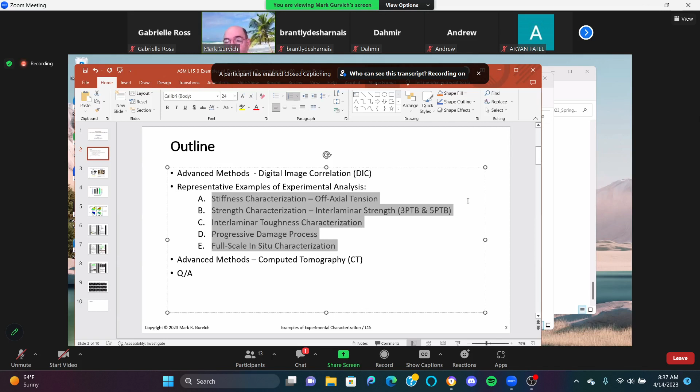One additional comment: I'm showing examples from papers we already published, so they're publicly available, and there are no restrictions to share. If some of you have specific interest, just drop me an email and I will send you the actual details. Of course, you can imagine there is much more that we are doing internally, but it's usually confidential and proprietary. Those results cannot be captured for public distribution.

So let's start with digital image correlation. Let me show you a high-level picture of how it works. It's an extremely promising experimental method, and it could not have been done like 50 years ago, because it's based on advancements of computational progress.

So you see my cursor. Imagine you have a surface of a structure, a surface of a coupon you want to analyze. On the surface of this structure, you could put a couple of points—in reality it will be thousands and thousands, but for simplicity I'm describing it as several points—for example with a pen or pencil; we're not talking about the methods to apply them. Actually, there is even a sub-industry on how to make those points efficiently, usually called speckles.

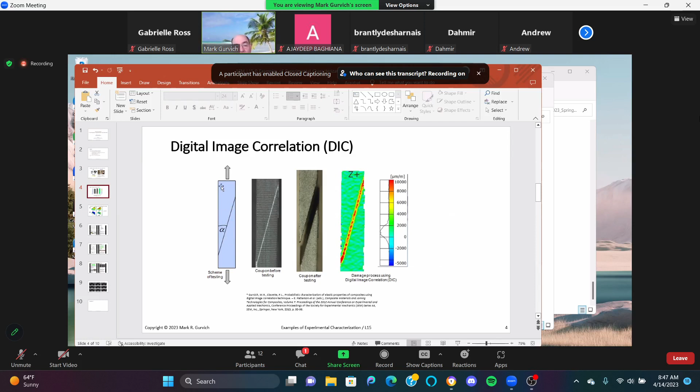This was definitely maybe the easiest scenario, not easy, but from a geometrical perspective, because we have a flat coupon, nothing is complex. But now these are a couple of examples from more complex real structures, when we have non-flat geometry, you see curvature here, here it's a connection between one shell and another shell, and this is one example. On the top, we see the measured displacement field.

Because we have so many points, tens of thousands, maybe hundreds of thousands, the field became extremely smooth, a nice non-uniform distribution of measured displacement. On the right side is the analytical calculation of strain, computed as the analytical derivative of the displacement measurement.

You see strain concentration will be somewhere here. If you're a designer, you'd say, this is what I need to worry about, check if it's strong enough. If yes, keep it or reduce thickness and size; if not strong enough, you need to change size or geometry. This is another example from a similar structure but different position.

Again, you see curvature in one orientation and curvature in another orientation. Two surfaces contact each other under a certain angle, and those are measured displacements in orientation X, global orientation X. Here it's already the calculated distribution of strains based on measurement of displacement and follow-up derivation.

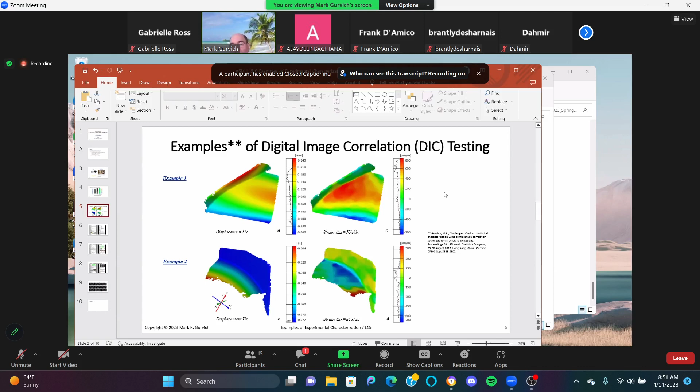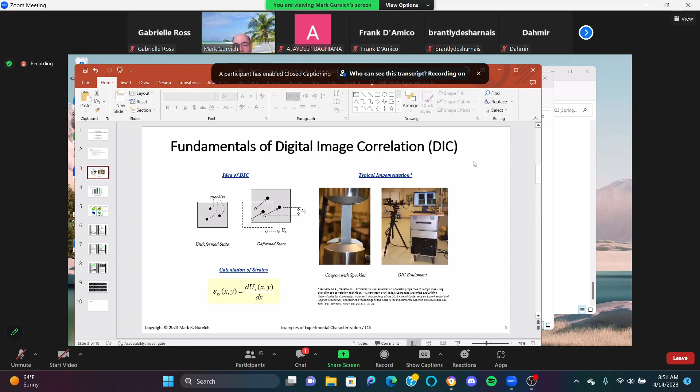It's very good for fatigue analysis when you have cyclic load. It's very good for high-speed load when you have impact, ballistic, or crash type of analysis - in this situation you just need to use high-speed cameras. We also applied it for many dynamic problems, including crash and vibration. So there is no limit. Again, I strongly encourage those of you who will move into the experimental world to pay attention and get involved with this technique. Any questions or comments so far?

No? So let's go to another example, and now let's move to stiffness characterization. Again, I will use the example of off-axial tension, and you will see even this relatively simple test can be extremely powerful from the viewpoint of generating new results. Let's go.

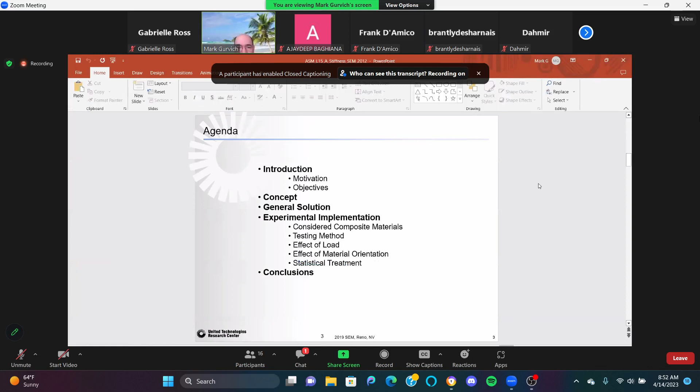This paper was published some time ago with my co-author Pat Clavette, and this is the statement of the problem. As I mentioned in the last lecture, it's an extremely powerful test when we have a coupon of composite material, cut under different angles.

So this is the scenario: we have a rectangular coupon of composite material. Material orientation 1 is under angle alpha with the applied load - let's code it 1 prime. In your lectures we usually code it X, but it's practically the same. So material orientation does not correlate, it's not the same as the orientation of applied load.

When we apply tension, as we know, because it's under angle, there will be non-zero shear - so it elongates, but there will also be non-zero shear, as we discussed in homework 1, for example. But let's prove it - let's prove it experimentally.

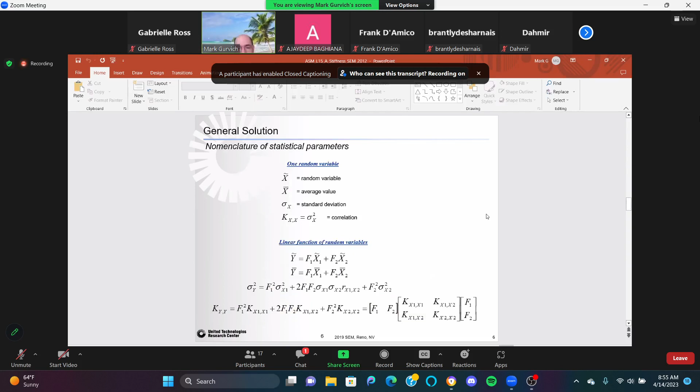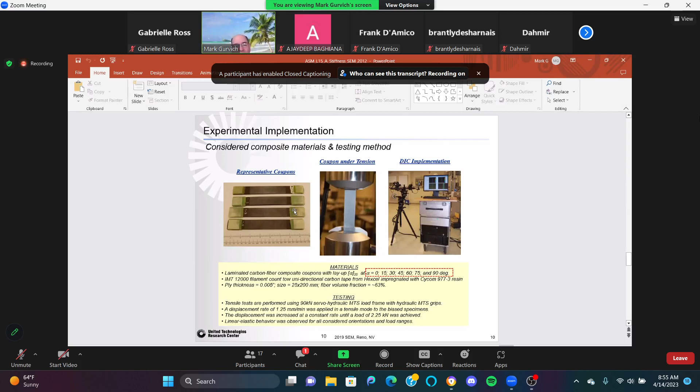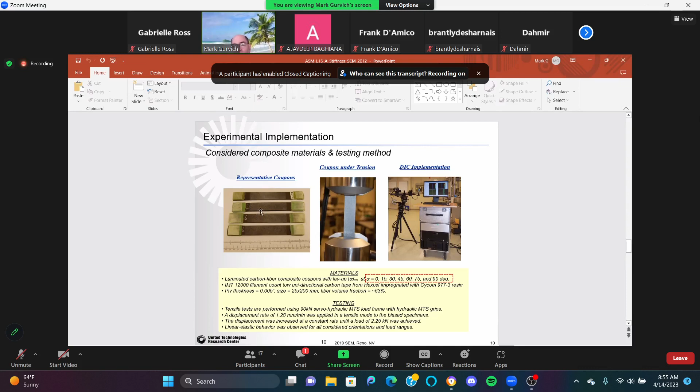So I'll skip all the math that we presented here, and here we'll show you what was done. Those images are already shared with you as examples of DIC, but we created different coupons, representative coupons under different angles of fibers. Please pay attention, at the ends we have those kind of clamping devices. You need to glue them to be sure that when you clamp them and apply a load, the composite part will not slip. Again, we discussed it at our last lecture, but this is just a good example of how those actual coupons are done. And now a couple of examples.

For example, I'll select a coupon under angle 45 degrees, in this orientation. And now I'm playing with different levels of load. At the very beginning, there is no load, so displacements are uniform. Red is 0, no displacement.

I increase the level of load, so it became slightly non-uniform. At one side, there is no displacement, and it started to move on the opposite side. So we fixed here and applied load here - you see my hand, from the bottom.

Now I increase level of load 450, 900, 1350, 1800, 2250, and you see non-uniformity increase, and the higher level of displacement we have, the more obvious we see this kind of shear, because of this 45 degree angle, and all of them have some level of non-uniformity, but with higher load it's much easier to see - this angle represents the shear we would expect for this type of position.

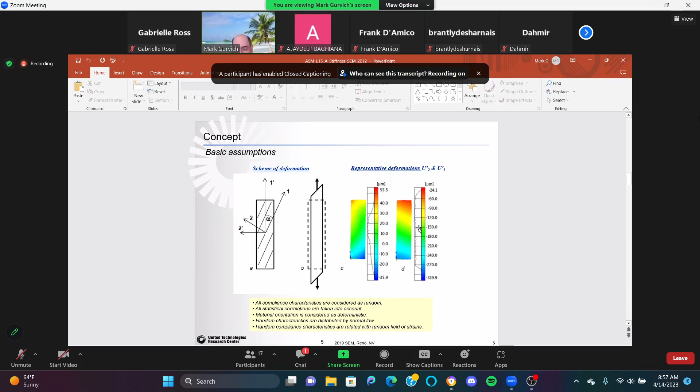And it's very important to emphasize, for this type of problem, if material properties were the same in orientation 1 and 2, we would not see this shear, because it would deform uniformly, as we discussed in modeling of deformation of anisotropic bodies.

And this is another interesting example. Now if we play with different angles - coupons under 0, 15 degrees, 30, 45, 60, 75, 90. This is 90, what I discussed just now, material orientation perpendicular to load orientation. So when you apply load, all of them move parallel, so there is no shear. Similar scenario with 0, it's practically parallel.

But now if we consider different angles, this kind of shear becomes more and more pronounced with higher angle. So you see at 15 degrees we have some angle, with 30 degrees we have this angle, 45, 60, and 75 it's close to 90. It's not 100% uniform, but this angle here is relatively small.

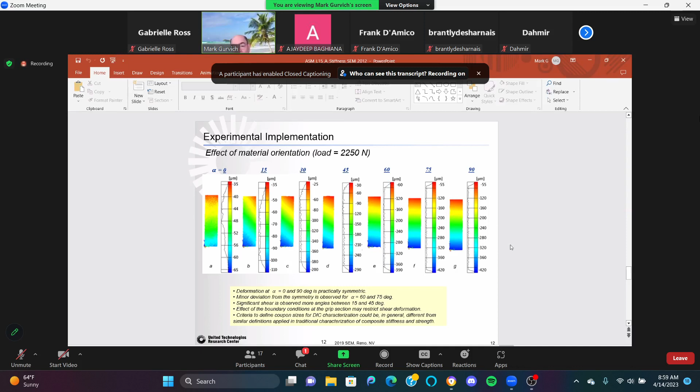So again, it's a perfect example of experimental validation of the expected analytical trend with respect to shear, but we had tons of additional data to analyze. And actually what we did here, we used these results to understand what is the variability of stiffness properties, how much we can trust them, how much plus-minus we have.

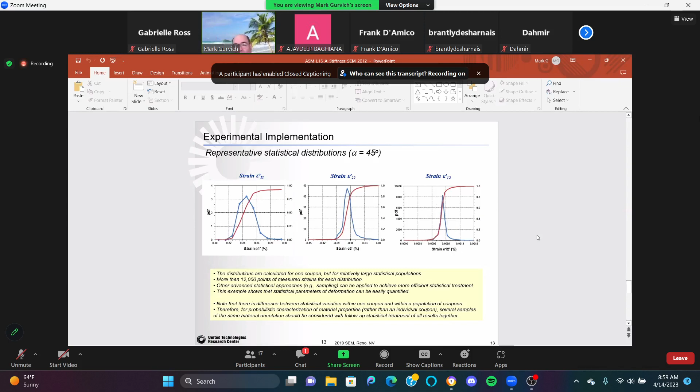Ladies and gentlemen, any comments, questions regarding this example? Yes. So let me go to the next example.

It's strength characterization. And again, it was published with my co-authors, Mark and Patrick, in 2016, so I can share with you.

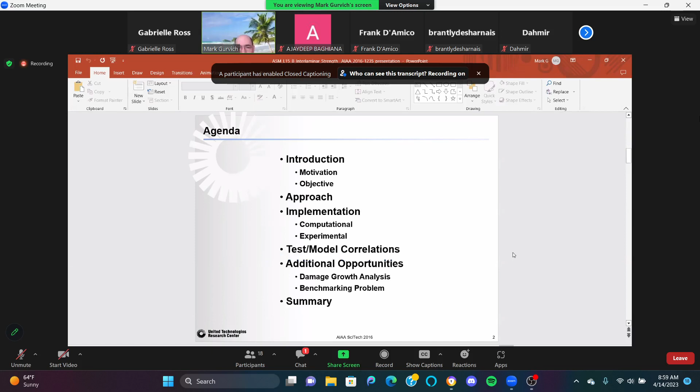And here the interest was to characterize interlaminar strength. You may remember from our lectures that for composite material, interlaminar strength is actually one of the most important allowables, because interlaminar behavior is usually the weakest. In plane, we have strong fibers, but between layers, only polymer.

So usually it's a big problem to be captured. And for example, here at the left, I showed a couple of photos when we have ply ends, and here you see boundaries, interfaces between different layers. So when we apply load, for example bending or twisting, usually the fracture pattern is something like that - a crack initiates at the interface and quickly propagates.

So to capture that and to analyze, we need to know allowables. This scenario is very typical. I'm showing here one representative example, an actual rotorcraft component.

So those interlaminar type of damages could be in one orientation, XZ, or another orientation, YX, here at the very end, inside, but this is quite typical type of scenario.

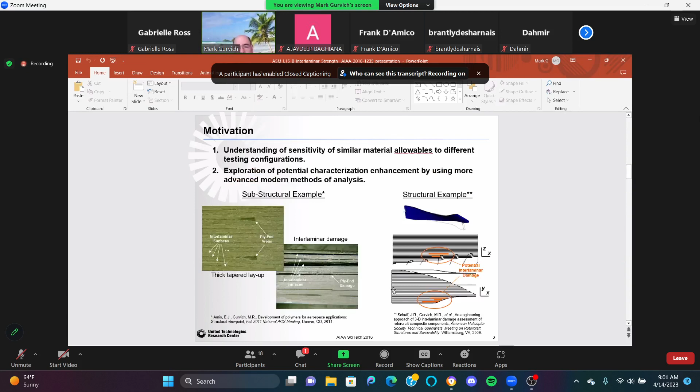So to characterize it, we need to have this interlaminar shear strength. So what to do - actually the traditional test is something like that: 3-point bending. You have two supports, an impactor where you apply load, and because of this bending you would expect shear, shear component through thickness, but eventually it will break if it's relatively short.

But we moved beyond that. We could say, okay, let's check if the same properties will be under different load conditions. So this is a scenario when you can kind of squeeze both sides to have built-in supports, but still use the same 3-point bending, but under different load conditions. Here we propose 5-point bending, a 5-point test.

And here, similar scenario, but with different aspect ratio. Reason why? Because 3-point bending is statically determined. When damage happens, the structure is practically gone. But with a statically indeterminate system, like here, you have first damage, the structure still can handle load. You increase the load, it will be next damage.

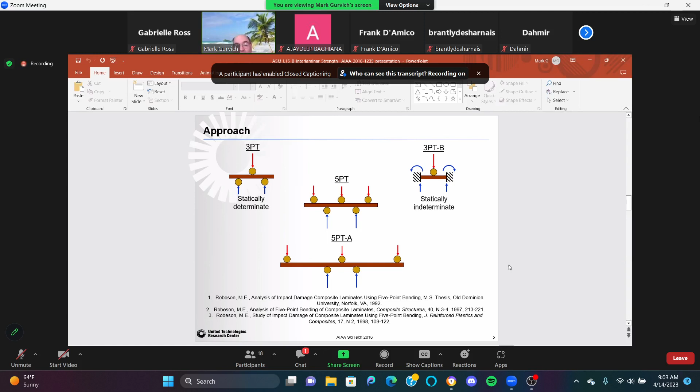So it was extremely powerful test what we proposed, to analyze progressive damage. But here, let's speak about interlaminar shear.

Those are finite element predictions for half of them. So for example, if I have this half, this will be one support, another support, the impactor. So maximum shear stresses are expected here and here. If I have similar 5-point bending, maximum will be somewhere here. And if I have 3-point bending, for a half, maximum shear component will be somewhere here. So those are predictions, 100% computational, no experimental.

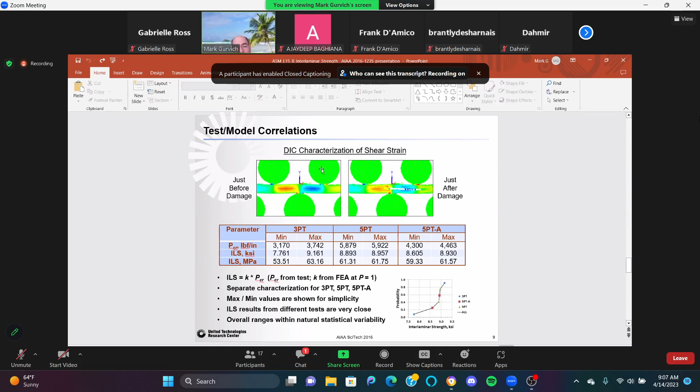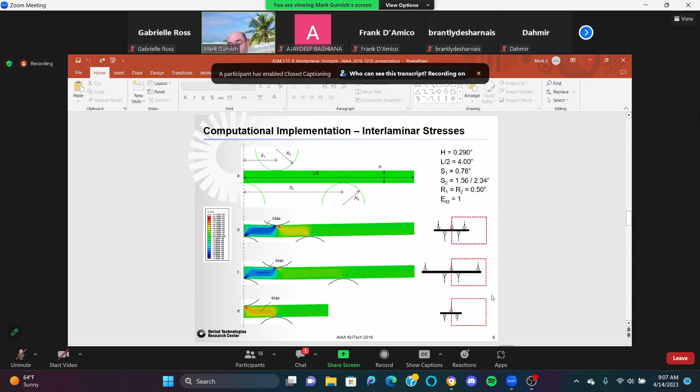And again, this is 100% experimental strain distribution. And this was - if you remember what I showed - this was what I expected analytically. So almost like twins. So it shows us that we can really trust the generated results. Actually, it was for this one. So we can trust the generated results, not only at absolute level, at this point, but also as a distribution of one field versus another.

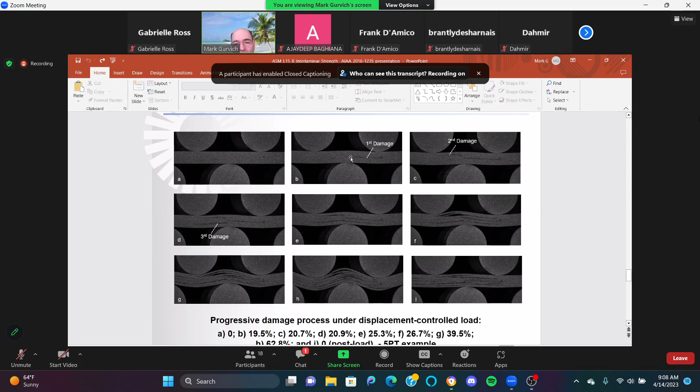At load 0, there are no damages. So increase the level of load, for example 19%, 19.5%, boom, I will see the first crack here, first interlaminar crack. Let me make it a little bit bigger so you can see it, probably you can see this crack, yes, here.

Continue increasing load, here will be the second crack. Continue increasing load, it will be the third crack. So continue with the load increase, it will be more damage, and eventually it looks like that. In this scenario, it's still capable to handle load, but now we see a lot of interlaminar damages, yes?

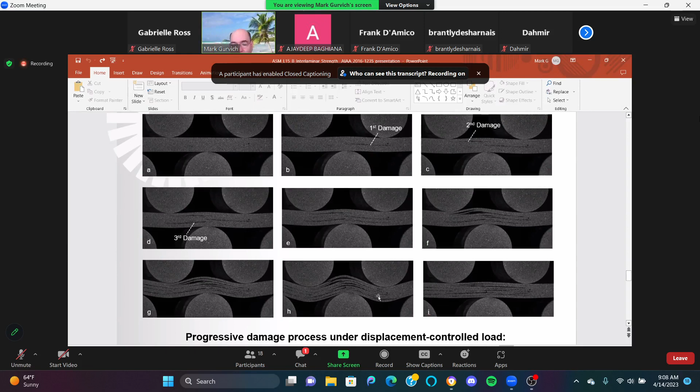And actually they can be predicted by damage tolerance criteria. It's another kind of set of papers we published to correlate this experimental process of damage versus analytically predicted. Yes, and eventually, let me go back.

Eventually, it will look like this. Yes, it's a photo when we have all those interlaminar damage at extreme level.

And those photos, now you see photos of tested coupons. After that, you still see after the test those interlaminar damage. And this is exactly what we wanted, to create like a standard test to capture interlaminar damage progress, because it's one of the critical weaknesses of laminated structures made of laminated composites.

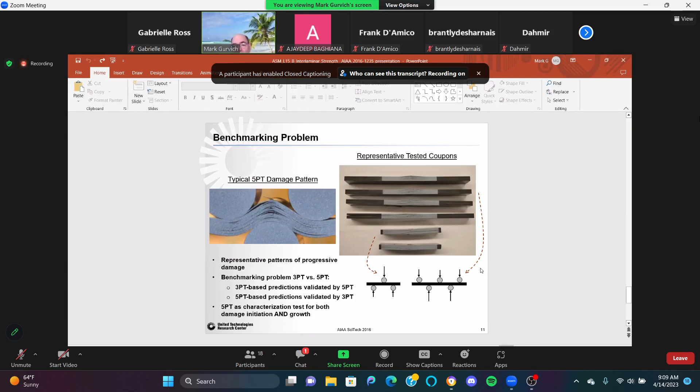Yes, any questions, comments so far? Again, just for illustration, but wanted to be sure you see it has real practical importance.

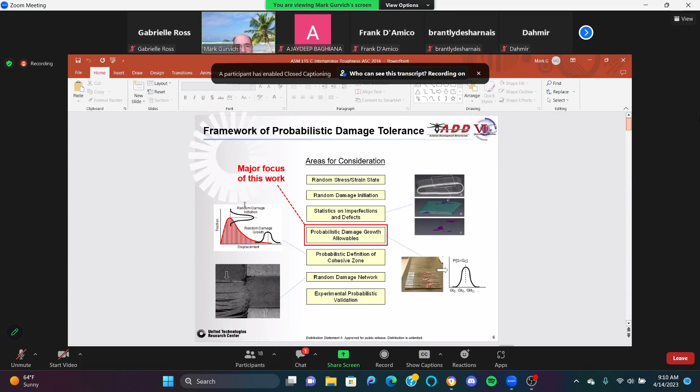So next example, interlaminar toughness. Yes, interlaminar toughness, have to characterize it. And again, we published a paper here in this area. It's focused on probabilistic characterization of interlaminar toughness.

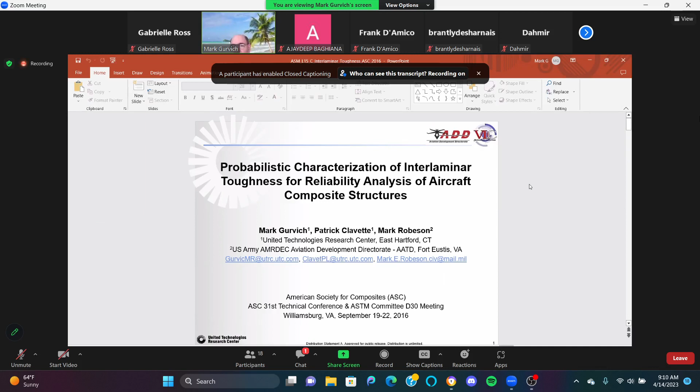Yes, I'll skip the probabilistic portion. I just will show you the interlaminar portion, but it will be easy for you to see how the actual test is performed, done. Yes, skip it here.

So we started with this example from the previous paper, and to predict this process, we need to know damage tolerance properties, primarily toughness. Yes, not only strength we discussed in the previous paper, but toughness. In other words, if you already have a crack, what is the risk this crack starts to propagate?

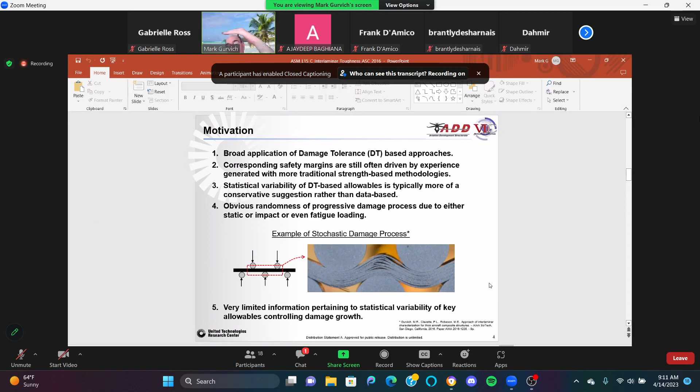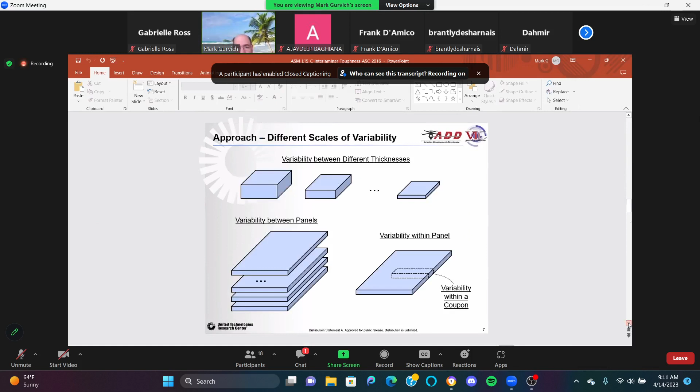So what we used, let me skip it quickly, we used this test as we discussed. This is a standard test recommended by the community. You remember I mentioned in the previous lecture the ASTM standard. So this is one of the standards.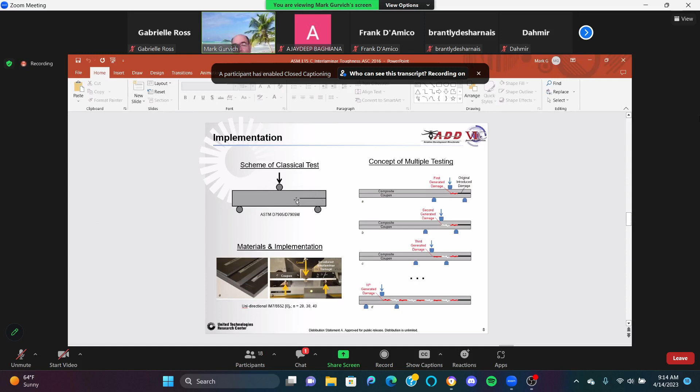So now crack starts to propagate from here, then from here, and so on. If you have a relatively long coupon, from one coupon you can actually capture a toughness measurement several times. In our examples, we capture up to maybe 15 to 20 times. Each data point will be slightly different through statistical variation, but altogether it gives us a very good statistical pool, providing a high level of confidence. This was the approach we did here, but to emphasize, this is a very practical test that people are using.

So for example, this is crack number 1, 2, 3 with each implementation - you see almost up to 16 or 17. So from one coupon, many data points can be generated. But what we saw was a big difference between initial crack - defined by Teflon insert and relatively smooth end - versus a natural crack, what we call them. The difference was almost twice. So that was one big observation, and another was that there's a relatively significant statistical variation defined by this cloud. And we played with different coupons of different thickness, and we saw if it's thicker or thinner, the generated data could be slightly different, which was important for our application.

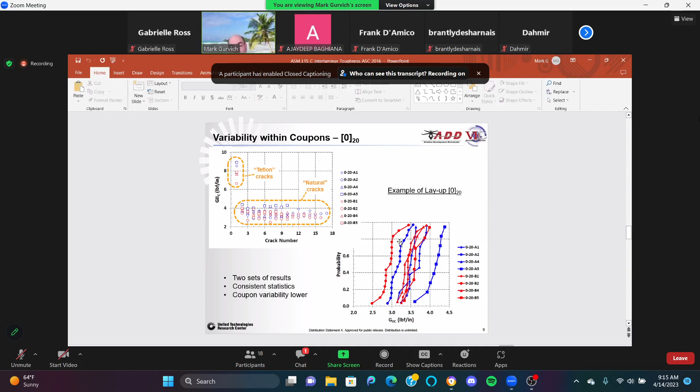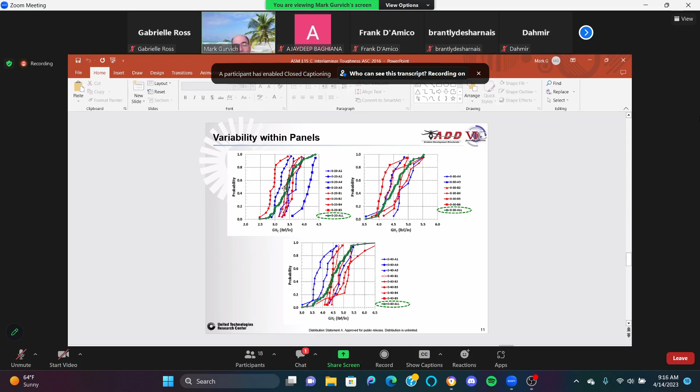I don't know how much you are involved in theory of probability and statistical analysis - you mentioned some of you had measurement classes.

So eventually data can be summarized in form of a histogram - this is what we did. And based on those histograms, we could say we're able to select not only the average value, but also the tails, like the worst case scenario with given probability. So what we did here is calculate statistical parameters of this interlaminar toughness, but also selected boundaries that we can use as allowables for a given probability of non-failure - 90%, 95, 99, 99.9, etc.

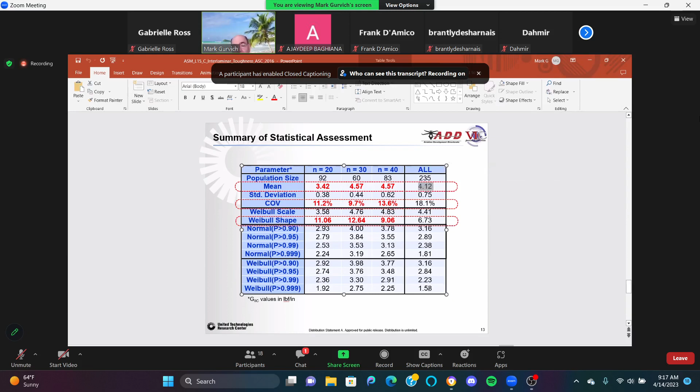And if we had one scenario, normal distribution versus Weibull distribution, we got different values of course. But from an engineering perspective, what you will do is select the worst case scenario. So from here you could say, I would need to use 1.58 - it would correlate with 99.9% probability of non-failure. And it summarizes all our statistics here, but the average here could be about 4.12. So it's a huge difference versus average and the lowest boundary for engineering allowable. So instead of using average, we need to use this tail value here.

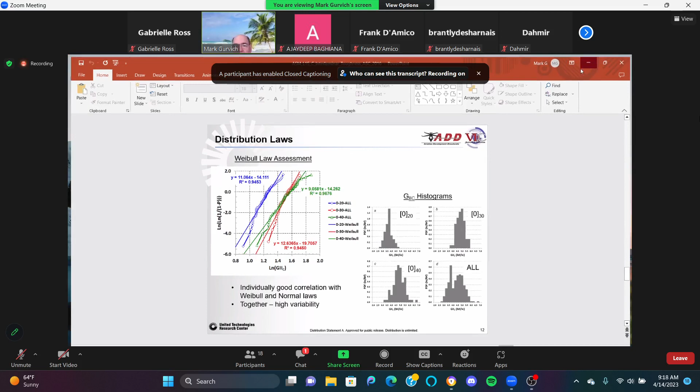Any questions, comments? Okay, let's go to the next example - progressive damage process.

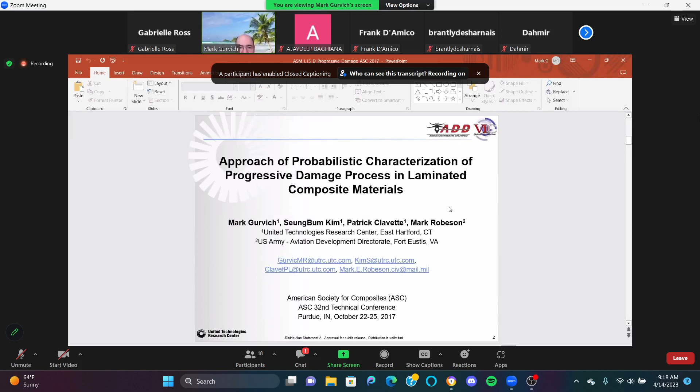We published this a couple of years ago with my co-authors, Dr. Kim, Dr. Clavette, Dr. Robeson. So I can show it to you.

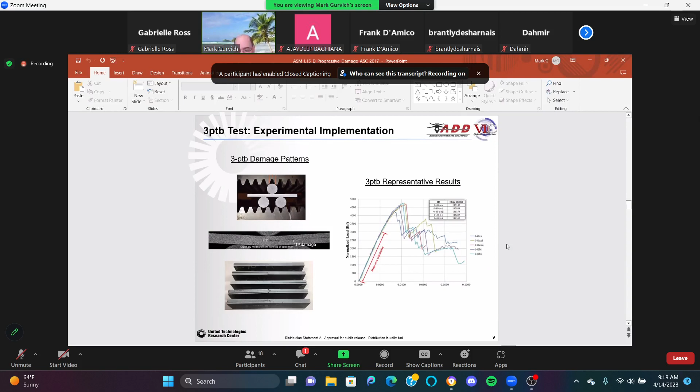So when we use it for a bigger population, each individual coupon will have a different pattern. Here's coupon 1, coupon 2, different coupons, but qualitatively they're quite similar. So if they're qualitatively similar, we can combine them for quantitative assessment of statistics and make predictions not only for average but for tails, for extreme scenarios. So usually what people do - it's a very time consuming, expensive test, but it's extremely valuable.

So we had about 20 different coupons. Our technician tested each of them. So each line here is an individual coupon. You see the cloud is relatively narrow - it's kind of showing qualitatively that it's the same.

But this also provides us with a very good opportunity to quantify variability here at the very beginning, or during the process. So, for example, if you want to design something, you will not select the best case - of course you will select the very worst case. One of the major takeaways from this class would be: as engineers in structural analysis, always focus on the very worst case scenario.

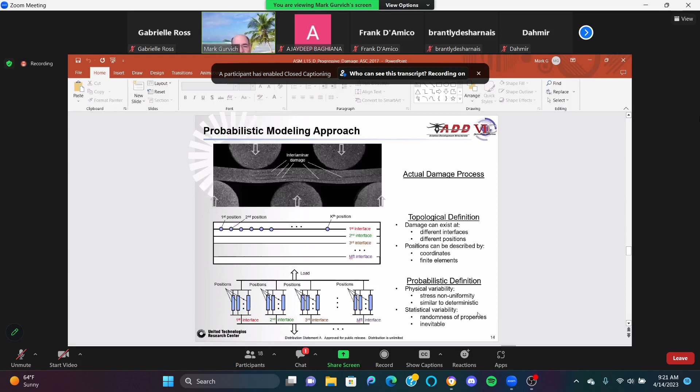Don't care if there are other locations that exceed the strength or toughness you need - you always need to worry about scenarios where you have problems, and your design will be focused on those locations. So again, about 19 different coupons, all of them are qualitatively the same, so we can quantify them, and analytical methods have to do it.

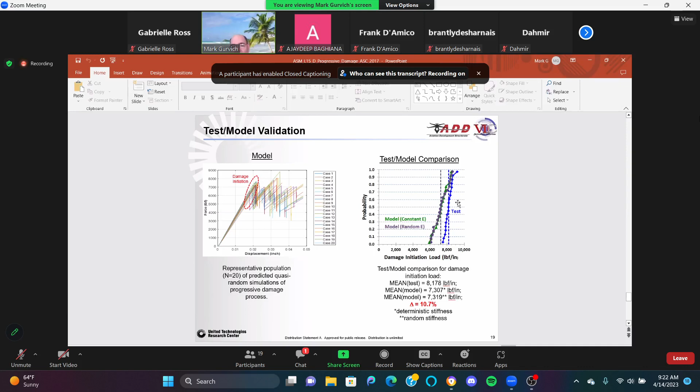But bottom line, test validation. So this is a similar diagram to what we predicted, because we were interested at the beginning. This distribution, the blue line, is test. The black and green lines are two different variants of analytical predictions, and the gap between them is about 10%. For absolutely blind, completely independent predictions, this is considered to be very, very good, because usually we have a much bigger gap, like at least 20%. So we're extremely pleased.

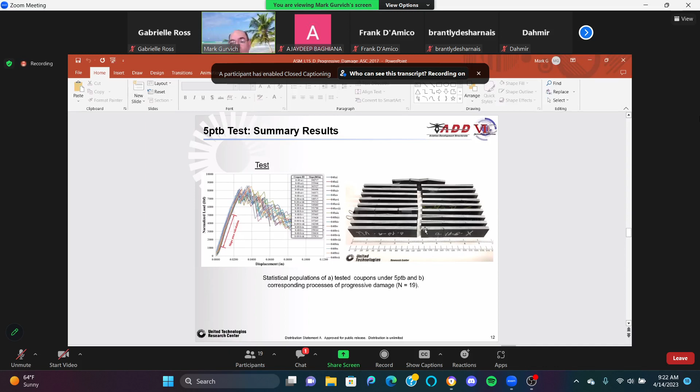But coming back to this example, toughness is characterized at the coupon level, especially if we need to know what is the level of their statistical variability. Any questions, comments so far?

It was this example of progressive damage. Let's go to this full-scale in situ characterization. Let me get - in situ, it's from Latin, should be like in this form. So what does in situ mean? You have a structure, an actual structure, not a coupon structure. You test it for some load conditions, see when the structure breaks, and from here recalculate material properties.

Usually people go in the opposite direction - the direct approach - to have material properties from coupons and predict how the structure behaves. But for some cases it's very convenient to do exactly the opposite: specifically generate some structures, break them, and from here recalculate material properties. I will show you one example in this direction.

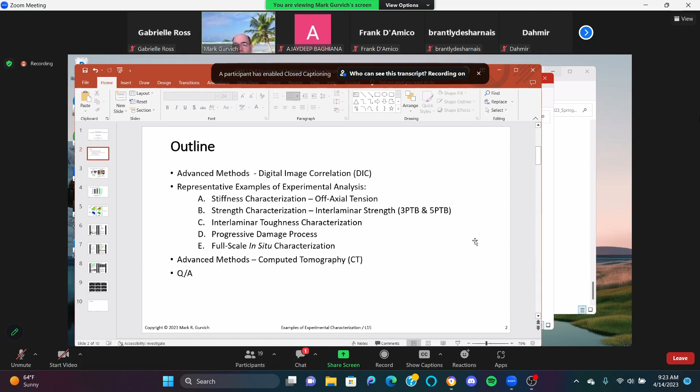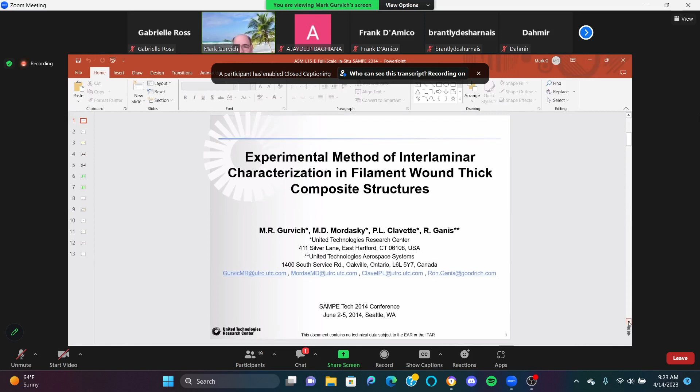So again, this was work we published a couple of years ago with my co-authors. The statement of the problem was the following: we had very thick composite tubes - you see those orientational fibers - but we needed properties of those materials, primarily interlaminar.

And for interlaminar, as I showed you before, usually people use these 3-point bending coupons. But here it was very difficult to generate 3-point bending coupons, as I showed, because you have curvature in one direction - so if you cut a coupon, it will not be rectangular, it will go with this curvature. And because it's so thick, it's actually very hard to generate this type of quasi-beam coupon.

So we started to think, okay, so what to do? And actually it's quite a typical situation when existing standards will not cover your needs. So what to do in this situation? You or your colleagues need to propose new tests, and this is exactly what we did.

So we said, okay, what would be a test to measure interlaminar damage - first of all initiation, and eventually propagation. But this work is focused on strength, so damage initiation - a crack along this direction. So we proposed this type of test.

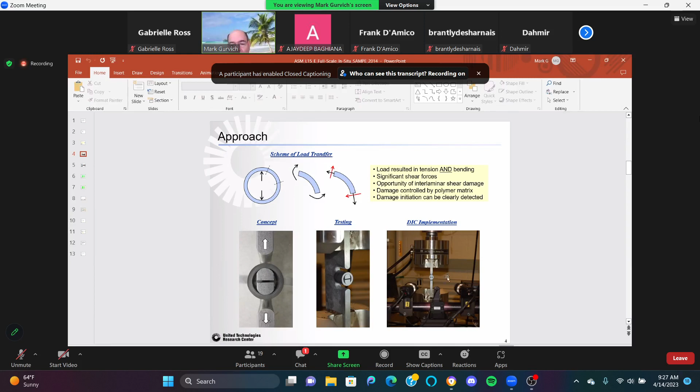So ladies and gentlemen, it's a very important point how experimental testing is performed, because when you design a structure, you really want to avoid damage, because otherwise it will be a bad scenario. But when you propose an experimental test to capture strength properties, you really need to generate damage, because based on this damage you could capture allowables or strength or toughness, for example.

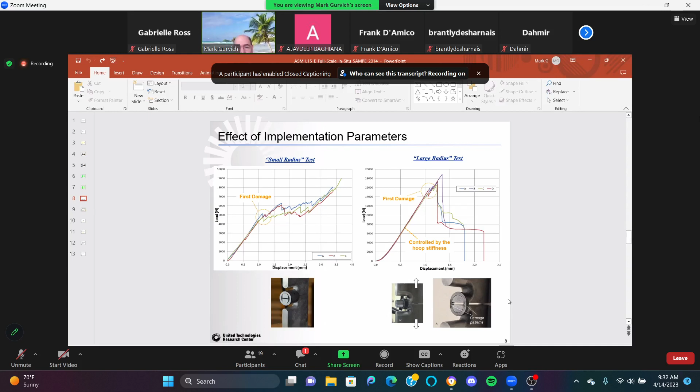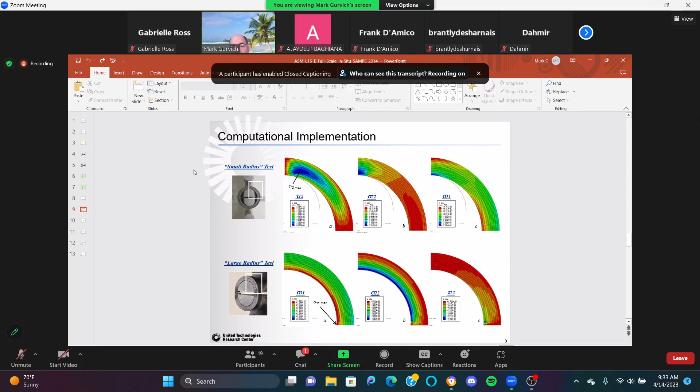So what we did here, predicted this strain analytically, compared with experimental results, and by comparison of maximum strain here versus maximum strain measured, you can calculate allowables, actual allowables in this case, interfacial allowables.

So this is a diagram, reaction versus displacement, finite element. This is reaction versus displacement by test. Here I don't know stiffness, but I can correlate, and by comparing this point to this point, predict stiffness, but also predict strength, interlaminar strength.

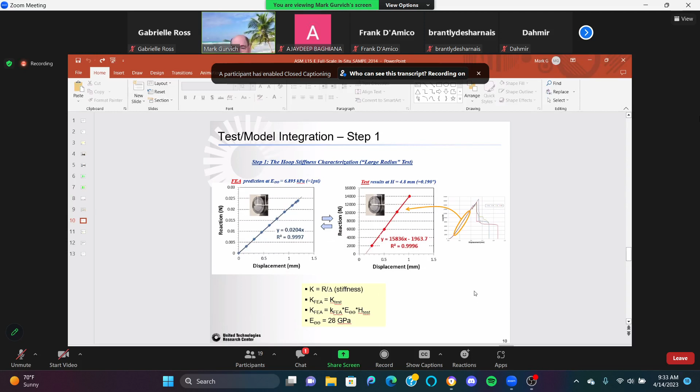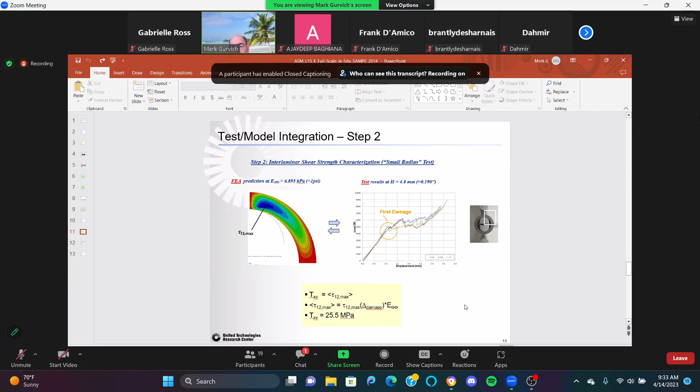Stiffness is predicted by comparing this slope with that slope, yes? And strength, I believe, was the next slide. We can compare this point and this point, and it will receive interlaminar shear strength. So this was an example coming back to this statement.

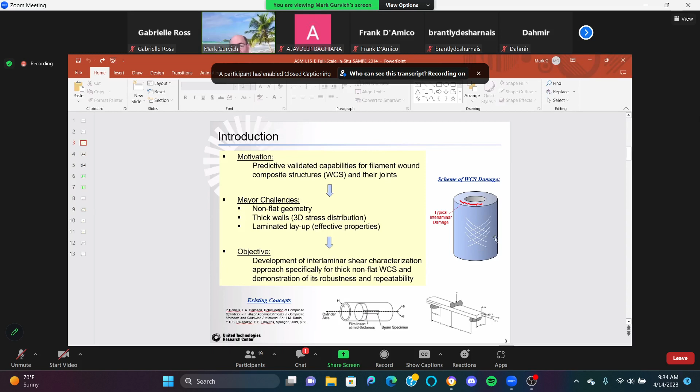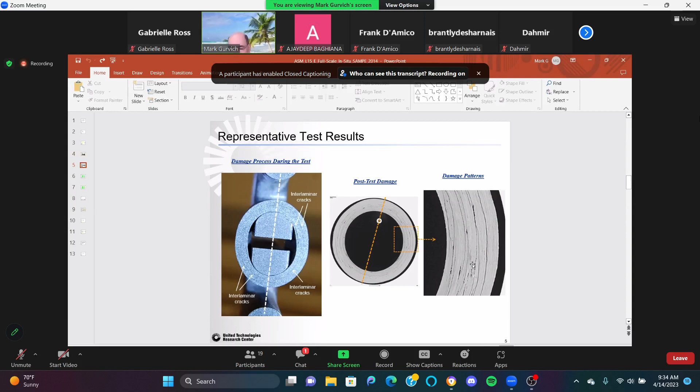What to do with material characterization if you don't have an appropriate standard, or an existing standard cannot be applied directly. So you need to propose a non-standard test, if needed, and be sure it captures your damage mode. In this case, it was interlaminar damage, as shown here. Any questions, comments? Okay, very good with that.

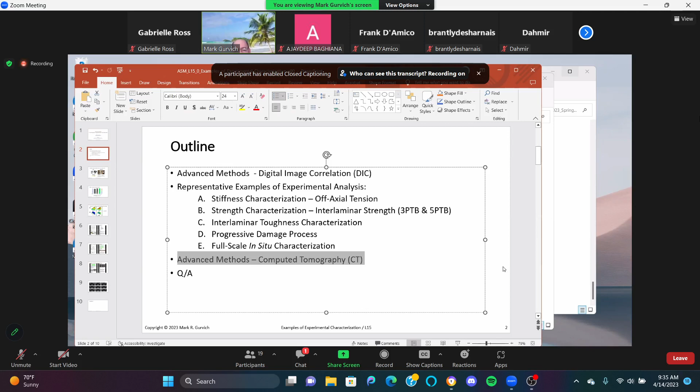This is another thing I wanted to share with you. It's an extremely popular, rapidly growing area, because it's based on a lot of computational advancements. It's called computed tomography. I'll show you a couple of examples, but many of you probably know it from medical applications, like the body can be tested under different angles, and you will see what is going on inside. It's heavily used in medicine, but we are also using it for engineering applications.

We'll show you a paper we published recently, a couple of years ago. It's focused on X-ray computed tomography, because it could be not only X-ray, but also MRI-based tomography, but this is X-ray based. So let's skip a few images.

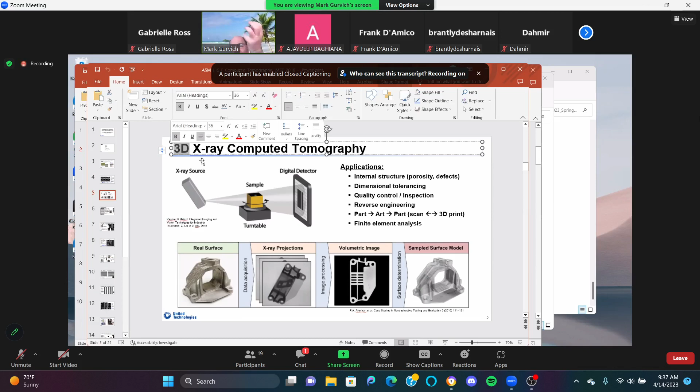This is the reason it's called 3D X-ray computed tomography. The key is 3D. Eventually it creates almost a volumetric image. You can rotate it digitally and see what is going on inside. And it's computed, because it has to be computed from different positions, using images from different positions.

Actually, this computed tomography technique got a Nobel Prize about 30 years ago, because it was really a game changer in the medical field. And it was applied not only to X-ray, but also to MRI, based on magnetic properties of different tissues in our bodies and in different structures.

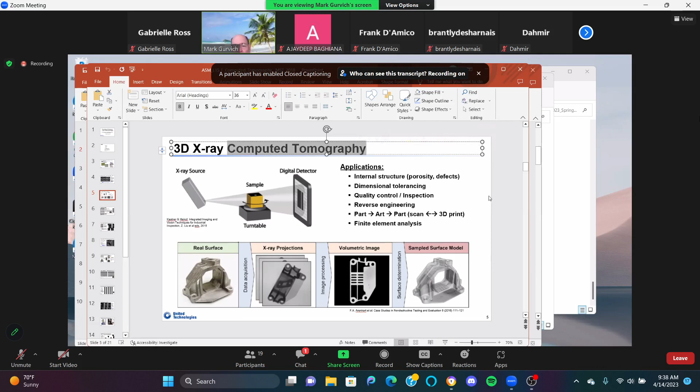If you had an MRI, you probably remember how it looks like - you can see almost like your body became transparent, you can see what is going on inside. It's super impressive, so not surprisingly it got a Nobel Prize. There was a lot of brainpower behind it, figuring out how to reconstruct a 3D image based on a family of 2D images. It was an extremely complex mathematical problem, so a lot of bright people were involved in development, and people continue to work in this direction to make it more accurate and more advanced.

So how it looks like: this is a real structure, for example metallic. Now you have X-ray projections under different angles, so you see a family of them. After that, a program will recalculate a volumetric image, and you can play with different positions. This is CT generated - CT is from computed tomography - and it generates an image practically the same as here, but with all internal design.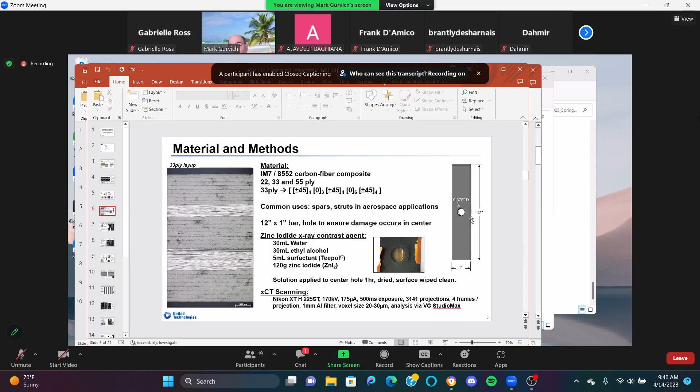We applied twist, and we wanted to analyze what would be the actual process of damage here, with the plan to compare with predictions. But for this type of structure, it's not easy to see damage, because damage actually initiates inside, especially at the interfaces between this hole and the entire body. So this was the reason we were extremely interested to apply this X-ray.

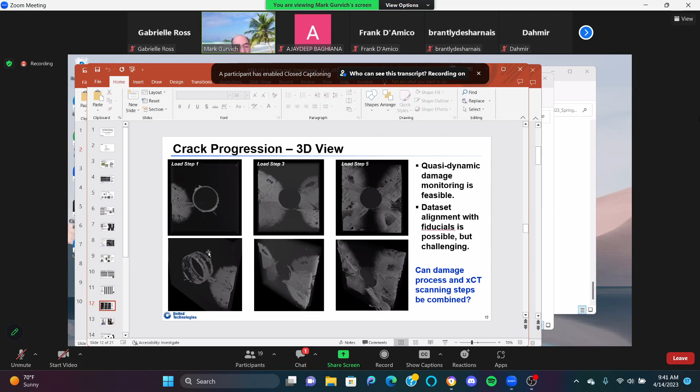And what we did here, if you're interested, we created this type of rig - this coupon with a hole to install it, applying torque. So what we did was apply CT, then increase level of load, make a new CT, again increase level of load, make a new CT, etc. So for each level of load we could see the pattern of damage, internal damage, which is critically important.

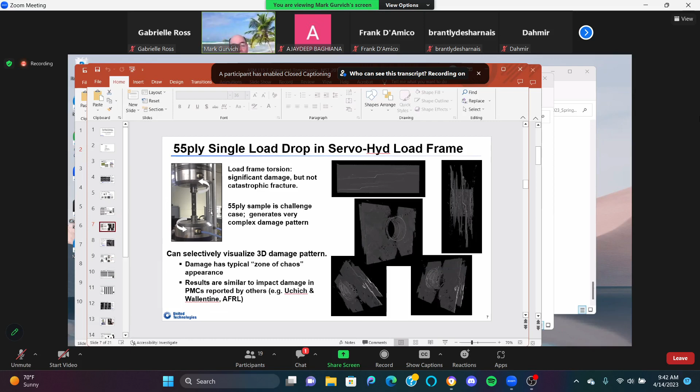So it generated for us almost an animation of the process of damage as a three-dimensional view. With two-dimensional, it's easy - you just put an external camera and see what is going on. But 3D internal, this was an extremely interesting test.

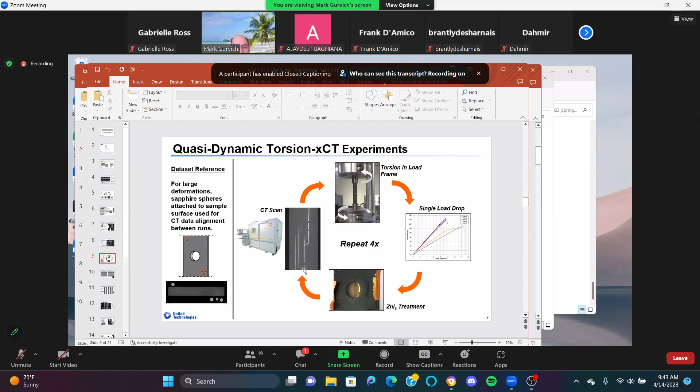And we played with different coupons - you see one family of curves, another, because we used different coupons. One was 33 layers, another was 55, very thick, relatively thick. So in both cases, we saw it's an extremely good method to do it.

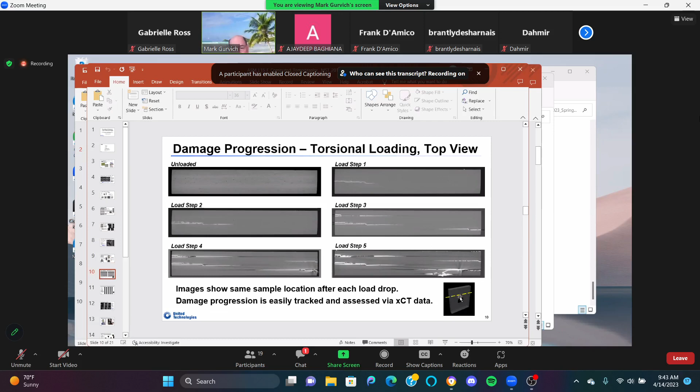And this is for some specific cross-section - this was the cross-section here. If you see, let me increase it a little bit. Can you see it here? Yes, so this is the hole, this is the specimen.

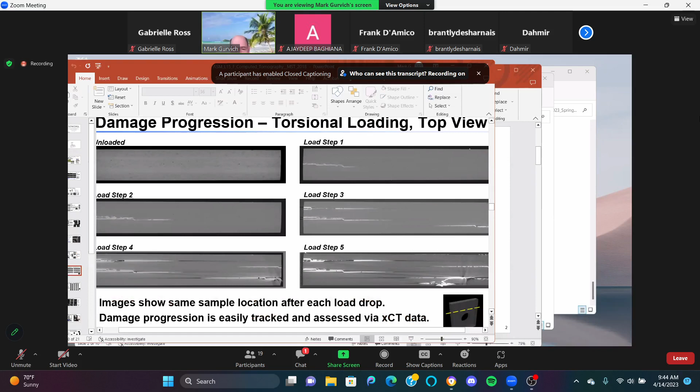So we cut here, we see the cross-section with different increments of load, becoming more and more damaged. Nothing here unloaded - this is load step 1, first crack, after which it starts to propagate. Step 3 became more and more damaged, 4 more and more, and load 5 you see a lot of damages, including almost catastrophic damage in this domain.

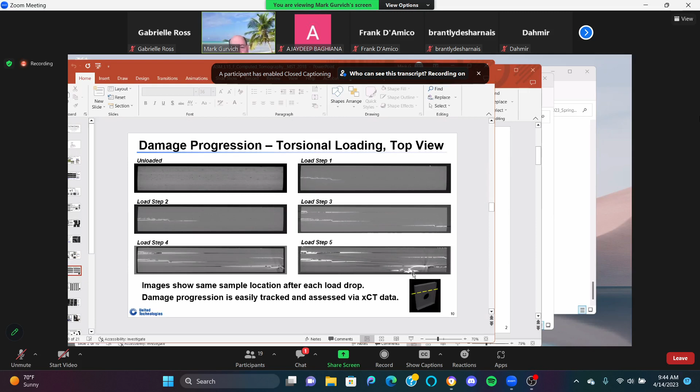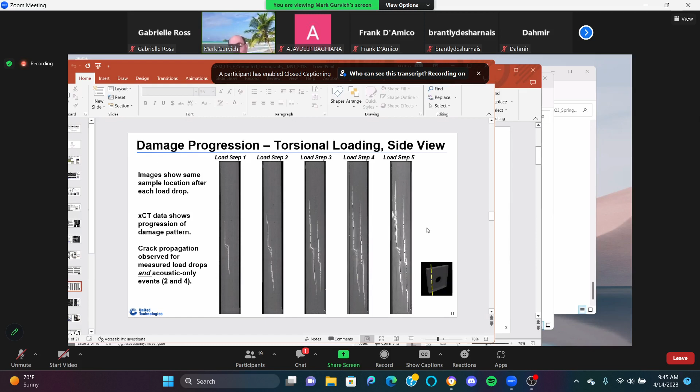So the idea was how to improve the structure - to focus on interlaminar damage. And actually there was an optimization recommendation here. Yes, this I showed you already - it's how to play with 3D.

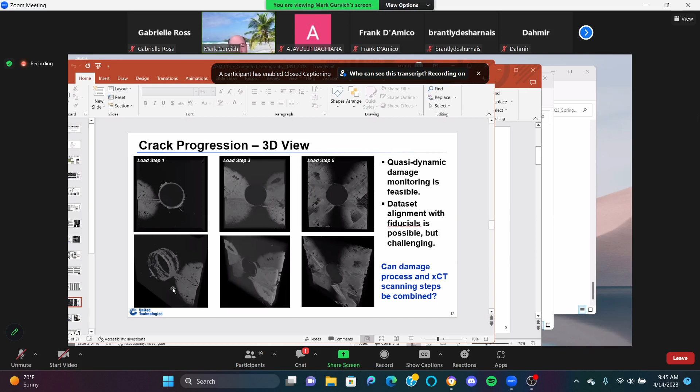It's almost like if it would be a glass structure, so you can see through. But it's not glass, it's actually black - it's like carbon fiber, completely non-transparent, but through this xCT you can see a lot of stuff inside.

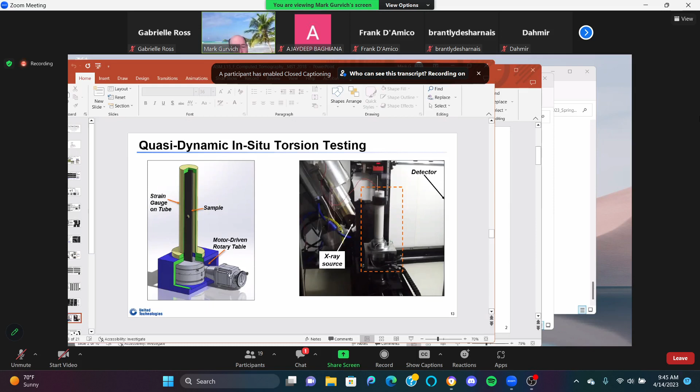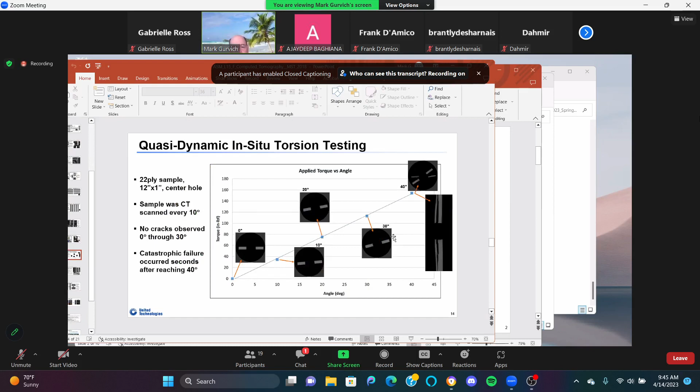And those are details of how we did the test, to be sure the torque can be applied with a specified angle, and those are different levels of load, different patterns of damage. So almost like you can see through the body, through the structure, what is going on. And those are a few images when it's collapsed, how internally the pattern of fibers looks like.

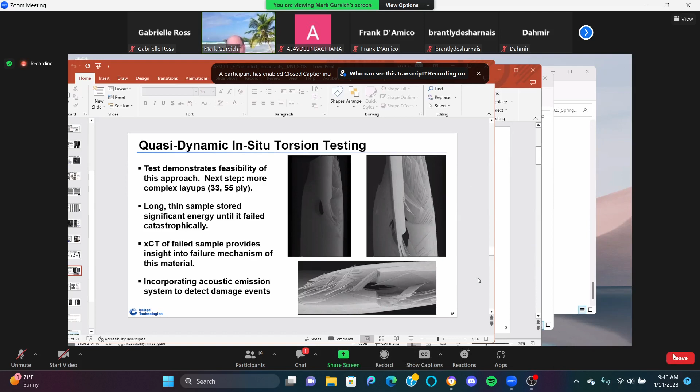So one observation was we actually saw that the fibers themselves will also be broken after interlaminar damage. So again, we propose several recommendations to improve structural performance of this type of stuff.